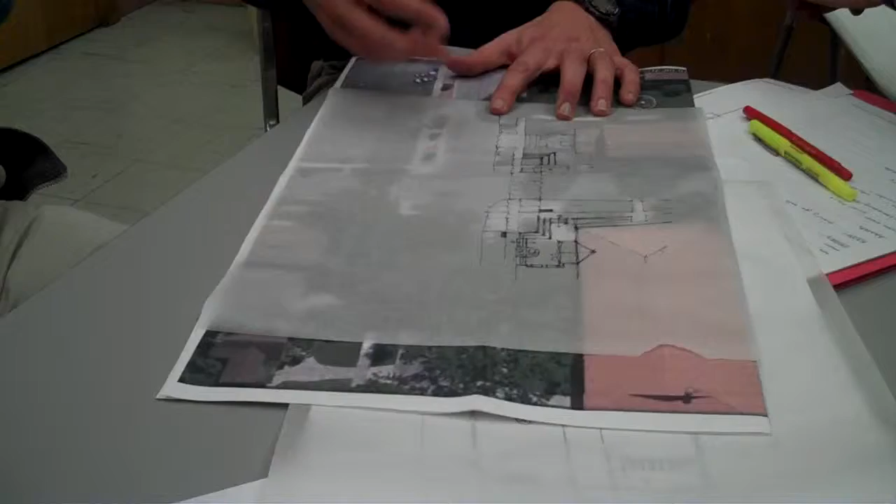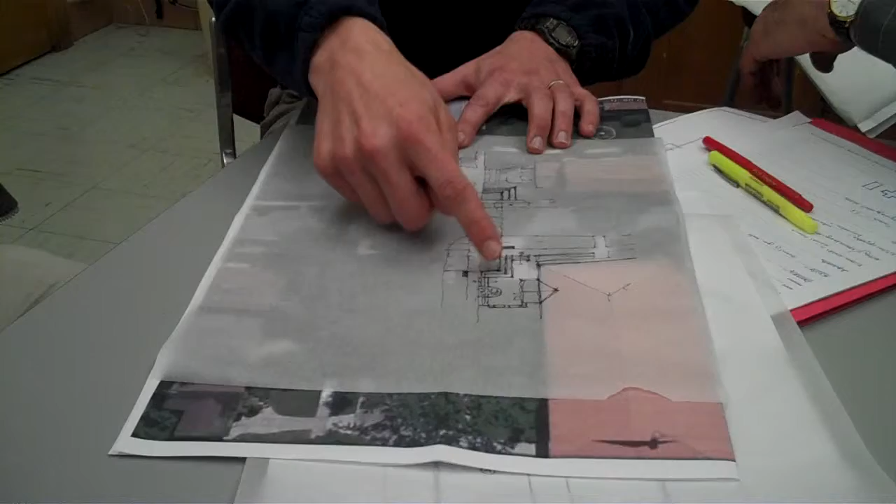To link the two buildings so that if you're coming here to a funeral afterwards, it's not necking down to a 4-foot wide sidewalk. It's generous and welcoming. And I think, as you said, the kids are hanging out here all the time, and that way some kind of amphitheater-y seating means they can pile in, but on both sides of the street, and it starts to link across there.

If you watch the kids leave any mass, they're always running up and down that hill. So that, and the fact that it's walking along this wall, and the fact that it's mirrored, means it's tied together.

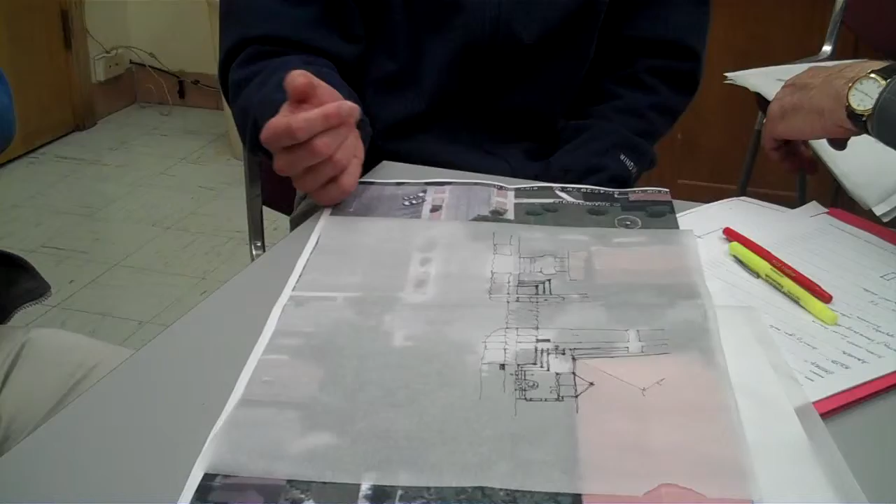I thought you were going to put a bridge across this. No, actually, I think if you make those walls to walk on and stuff, it makes it more fun for the kids. Which, I'm serious. I mean, little kids and...

So this didn't change much. You know, on your first floor, just real quick.

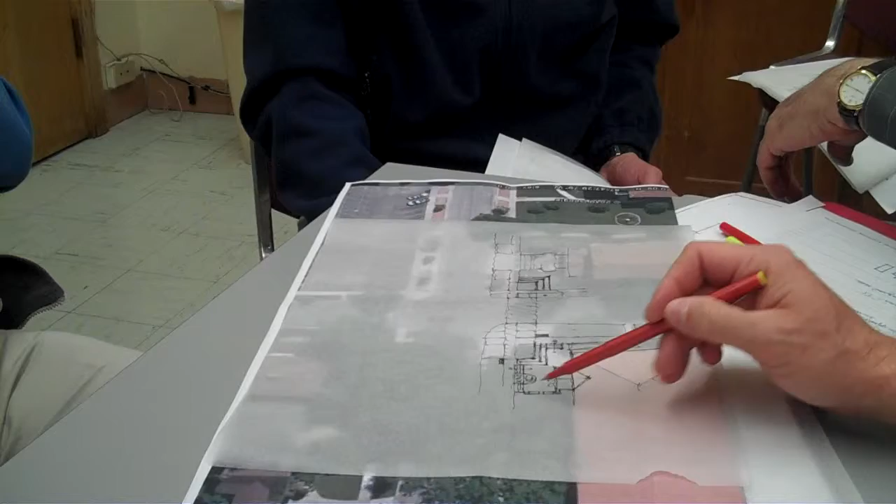I think that if you did decide—one of the things that did seem to be really liked in the discussions with the group was an outdoor patio, a courtyard. So if this courtyard for some reason doesn't feel big enough, you could still go out here and have some additional gathering space, just to supplement.

Well, that—I like the articulation of yours. It wasn't just a square, but it had some nooks and crannies to hide, to settle back into and be comfortable.

But the idea—you can just picture people lounging there, just like they do in front of the bank building downtown, with the big lunch area surrounded by...

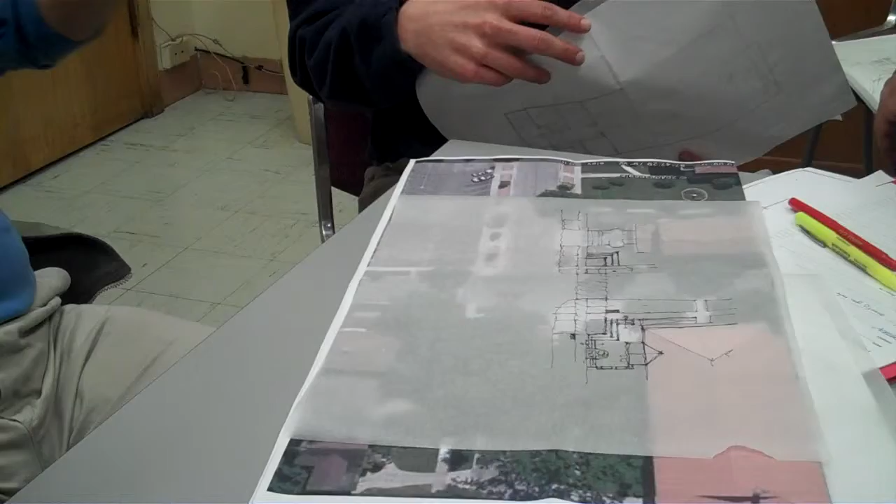Play this out a little further, though. Is there a chance, if we get far enough back, that we could actually have a drop-off lane, or what do you think of that?

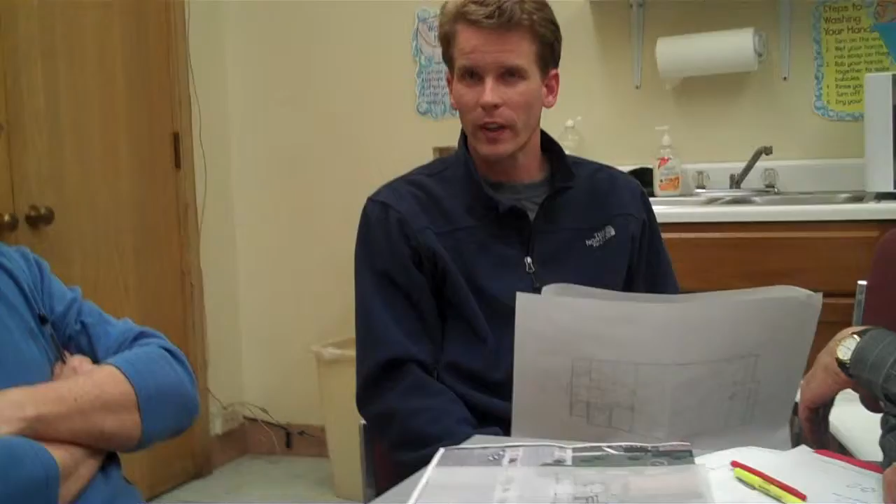I mean, well, having a drop-off—it's not like we want to create a portico here, but procession is a part of it.

But they have to deal with the vehicles. They're coming over here, or all the handicap parking basically becomes that block.

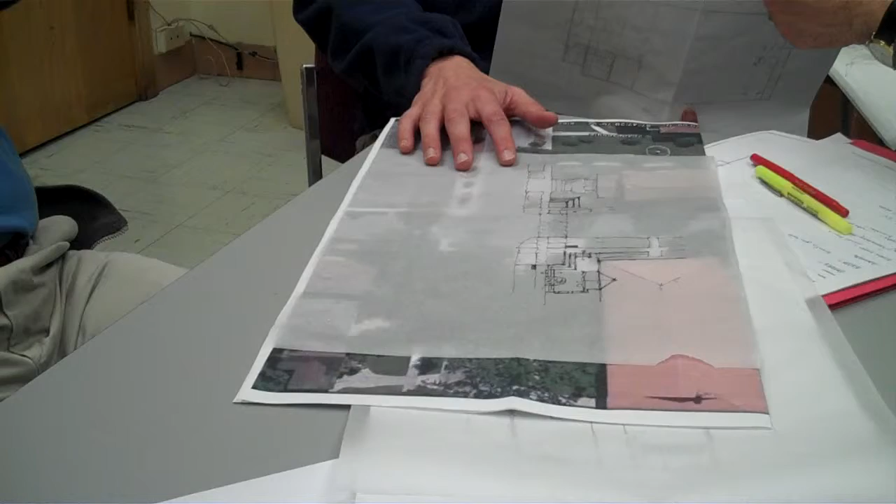And you can imagine it's something the city—I think we have to start to think about, though. And that gets back to: the more you pull it back, the more it gets out of the corner, which is not an intended thought.

Upstairs stayed very much the same. It was just starting, but what I did do is start to layer in some ideas on the ceiling.

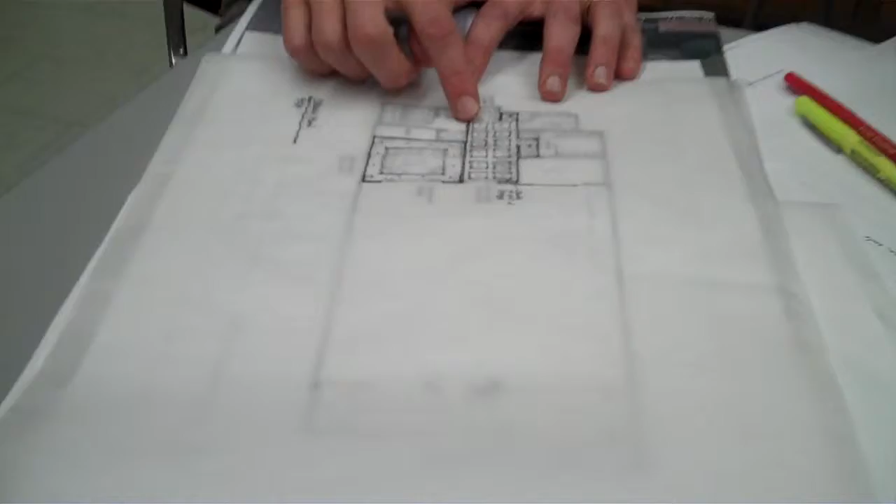And to try to keep it rather equal so that it can be reconfigured however you want. Maybe it's just a series of little coffers, so that if chairs shift, there's not a balance or a bias one way or the other.

But I also thought maybe this is lower. Right now it's the full height of McDonald Hall. Maybe this is down to 10 feet. So relatively it's high.